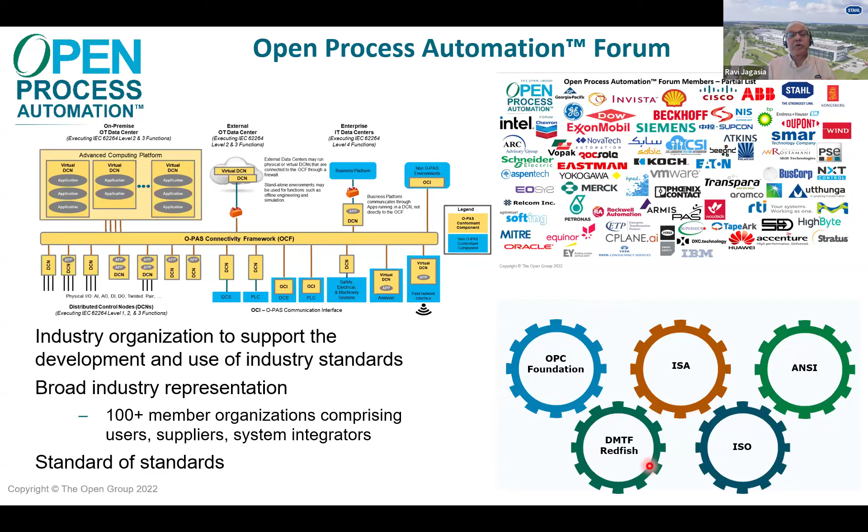So we are working with a lot of standard development organizations, the OPC Foundation, the DMTF, and various others, where we are working with them to update, improve, add value, and develop and integrate those standards into an overall open process automation standard.

Today's ecosystem, you have the automation vendor—could be a PLC, a DCS—and then a system integrator like you, putting together the solution based on the end user, your customer's applications. Your expertise of the industry, of the equipment, your expertise of the processes to implement and execute, which is also a very important part of the expertise you carry, and then even the possibility to maintain it over a period of years.

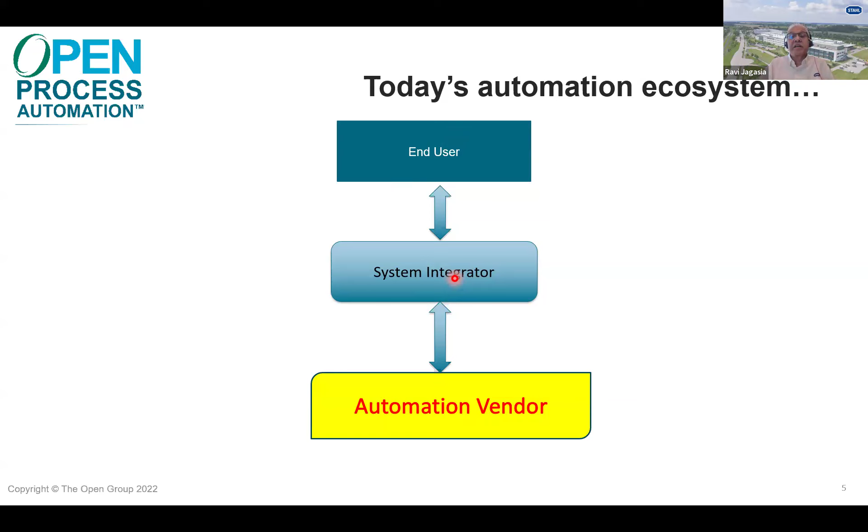So this is your current ecosystem, and what OPAS is trying to do is build up something very similar. You are still in the middle of the game, but then you have separate hardware suppliers and software suppliers. Part of the story is that you will be able to have an interoperable system, and interoperable systems would give you the flexibility of using multiple hardware vendors and multiple software vendors. It also gives you the facility that you would be able to use softwares and port the applications you have developed from one hardware to another. So a lot of the capabilities are brought in by these two vendor segments.

Now, it is not necessary they need to be separate. They can be all one. You could have the hardware vendor also providing the software component as well. And then as an integrator, you are implementing it down the way and installing it at the end user's facility. Service providers basically are providing these services from a product lifecycle perspective. You are providing support during the operations at the plant. So that could be another role which is part of the ecosystem which you could be implementing.

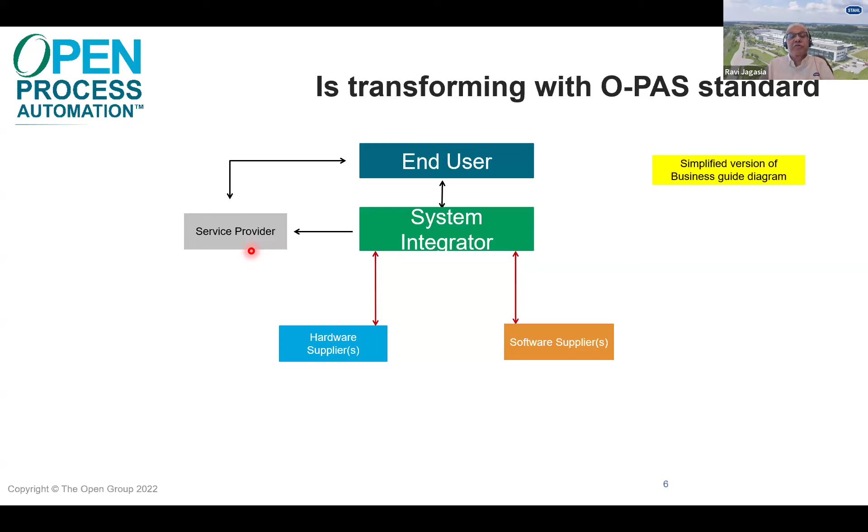How are we developing the standard? The ecosystem—you as a system integrator, the vendors, and of course the end users. You all have user stories, you have experiences with your current installations, and you are wanting a change, you want something different. What are your expectations?

You would be building it up and sending it over to OPA as user stories. We can develop use cases out of that. And probably then even a system integrator is providing a use case, or even the vendors are putting up the requirements. All of these boil down into the standards. They are being discussed, they are being evaluated, and then they are being generated as profiles, as certification requirements, and then they are being implemented into a standard. So that is how the industry voice drives the OPA standard.

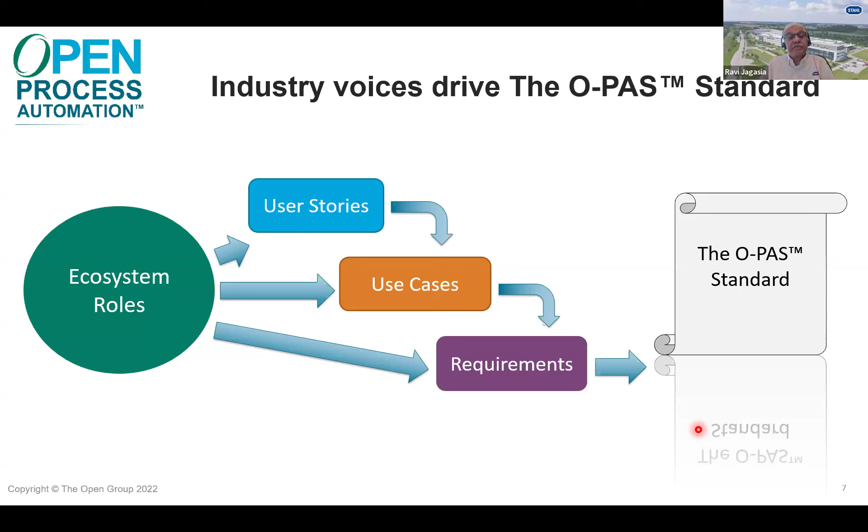Standards are going to enable functionality. What you see right now is the standards which have evolved over the period of some 2017, if I remember correctly. First version was with interoperability, then was the base configurations, function blocks, configuration portability, and then these are in the works as of now—application portability, orchestration, physical platform. So it's an evolving standard.

Is it done? No. Is it ready to be implemented? Yes, version 2.1 is ready for you to implement a testbed, is ready for you to implement a pilot project and even actually commercialize. This is what we are going to show you—a commercialization of the project.

So that is the workflow that we have within the forum of what we have to do to finish the standard. Of course, it is a continuous improvement project, so we'll keep on updating, improving as what we learn from these implementations and what we need to adapt and improve.

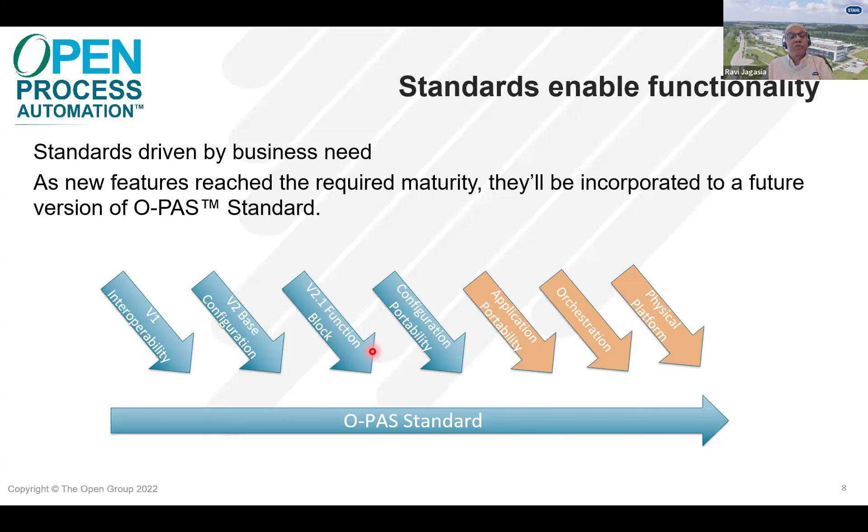COPA. So OPAF is a standards development organization. OPAF will not go out and market. These are the OPAF members who have come together to market the OPAS-based solutions. So together with CPLANE, together with Control System Integrators Association, with currently these integrators—Wood, EOSYS, Burrow, and others—and then the component suppliers, we are putting together industry-proven devices along with the capabilities of system management of CPLANE and CSIA, and then also the system integration teams which are there.

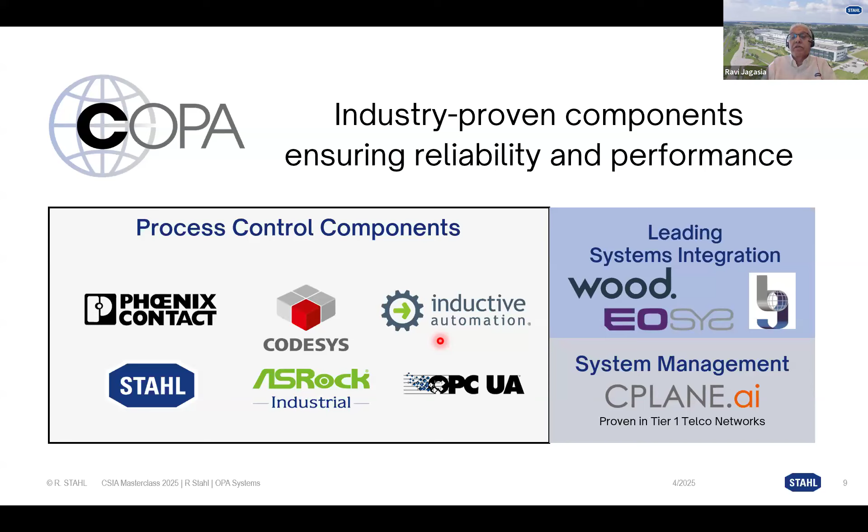It was, of course, built on the open standard, the OPA standard. It ensures high availability applications. It's intrinsically secure, capable of remote management, and the cost factor is the most attractive part—not only the capital purchase cost, but also the total cost of ownership. You will see a lot of savings there.

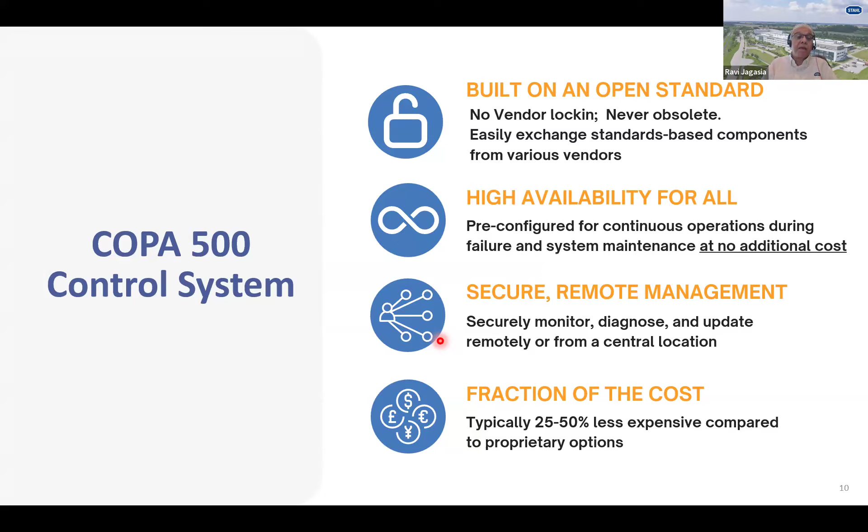Texas A&M project—this is the first commercial project from COPA, and I will let Timothy take over here. Okay, thank you, Ravi. You have control. Okay, very good, I appreciate that, Ravi. I'd like to advance to the next slide now. There we go, okay, yes.

So this project is for Texas A&M Nuclear Engineering. They are ranked #1 in undergraduate nuclear engineering programs and #2 in graduate programs. It's home to one of the largest university research reactors, with a strong partnership with national labs, the Department of Energy, other industry leaders, and strong support from the state of Texas. They've formed a Center for Advanced Small Modular and Micronuclear Reactors under the Texas A&M Engineering Experiment Station, with the goal of advancing the nation and state's leadership in advanced nuclear technology.

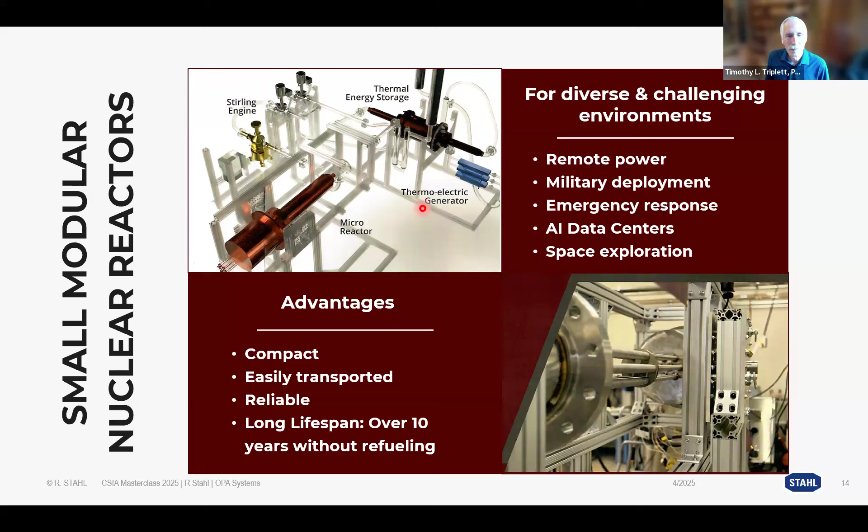Let's see if it'll go to the next slide. Yes, okay. So A&M's objective—because small modular and micro reactors are going to often be in locations where there isn't a large staff to support, train, or operate them—there's a need for autonomous control and remote management. And of course, when you start talking about remote management, cybersecurity becomes a critical factor. So their objectives were to answer these challenges: remote management, autonomous control, and cybersecurity.

If you'll advance to the next slide, please, Ravi. So they established a controlled test bed to prove out the technologies that are critical for these reactors long term.

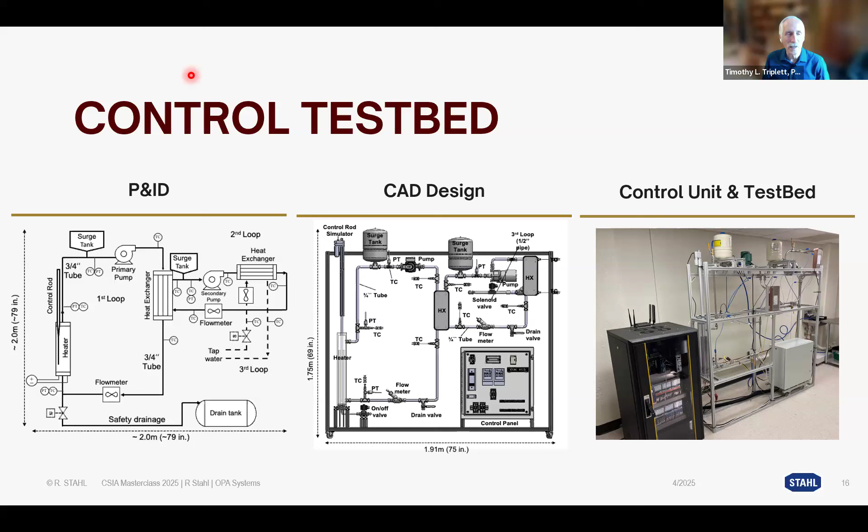So having designed the experiment, the next question was, what control system are we going to use? I mean, there's a variety of standard control systems available out there, but they wanted something that was modern, open, and could be the very best at helping them reach their research objectives with cybersecurity, reliability, rapid iteration of the design, so they can make changes, test them out, do modeling, and iterate over and over again.

So that was important to them, to have high compute and data capability, remote management capabilities for it. And so when it all boiled down, the COPA 500 was an obvious choice.

The Stahl IO is very flexible and proven. The CODESYS control is a de facto standard for IEC 61131. The Ignition HMI also very well established and from a good company with good support.

The ASRock industrial computer - and this leverages all off-the-shelf type of technology. So these components are not expensive, especially compared to a DCS vendor or even the normal smaller PLC system suppliers. A Supermicro, terrific capabilities as far as the computer.

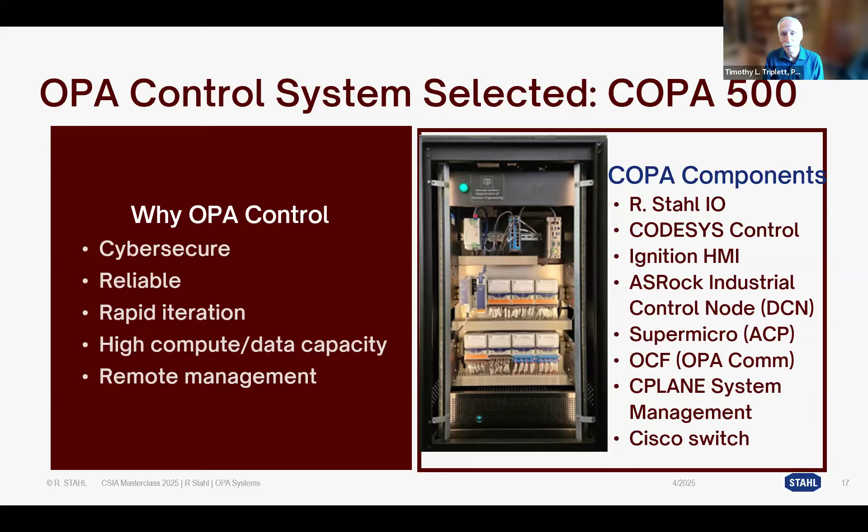As you're looking at it, on the right side, power supply, switch is all there. And it makes for a very nice system. And it's fully integrated - that was of particular interest to us.

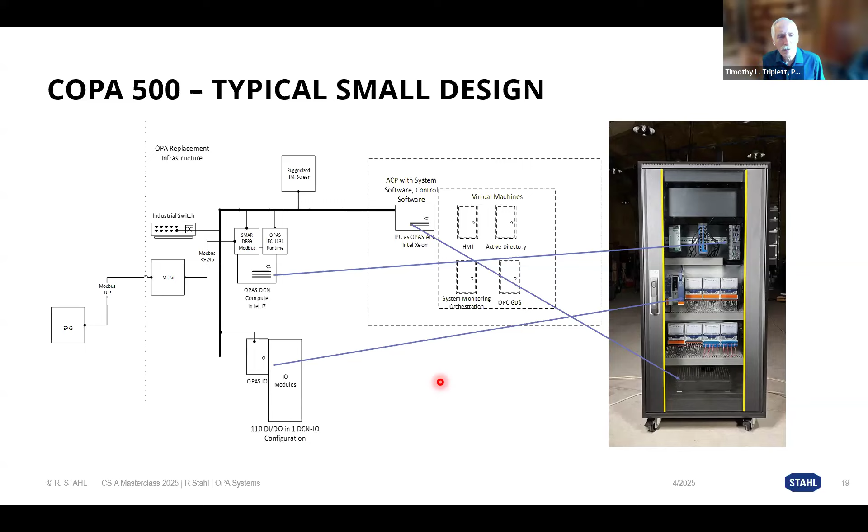Okay, so now, Ravi, I'll pass it back over to you. Thank you.

And here we go. I'll give you all a brief background about STAHL in case you don't know, and also on the IOs particularly, how they are available with the OPA solutions. So we were founded in 1876. I may look old, but I'm not that old.

It's a company with a lot of electronics involvement, electrical products, and we also build complete solutions, in the sense that in the IECEx and ATEX world, they need a certified workshop who can do it. Here in the NEC world, you have the UL 698A, which allows you to build and certify the complete solution. We can also do trainings, and we also do hazardous area evaluations and services related to that.

Based in Germany and accessible all over the world, with around 18 operating subsidiaries and beyond that about 59-60 offices. In 2024, we closed 344.1 million euros with 1,743 employees across the globe. Small company, small but nimble. We were able to learn the opportunities of these new or emerging technologies and be part of it.

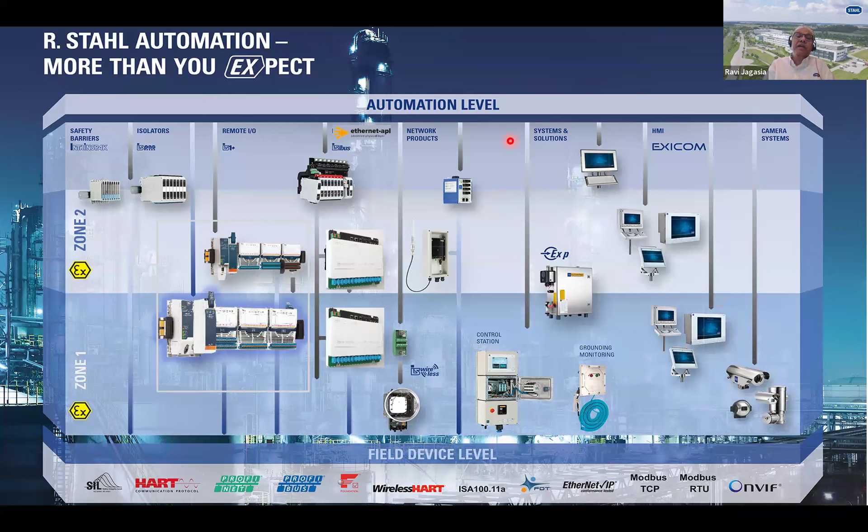We've been doing this for the last 30 years. In fact, the iteration from 2000 onwards has been consistently the same. So you have a very good form fit factor, which allows you easy replacements. Very early, in 1997, we implemented the Profibus DP RS485 standard, which we then donated to the Profibus International Organization. We were the first to use in 2009 the fiber optic Op is standard, which allows us to run fiber optics into hazardous area without a conduit, just regular fiber optics, maybe an armored cable.

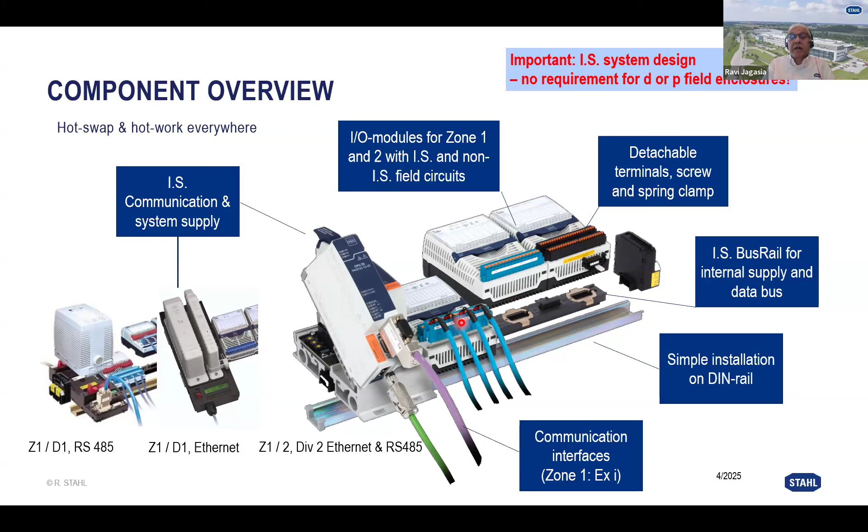These all have an intrinsically safe communication bus in the back, so you can implement hot swapping. And then, of course, the flexibility of using either detachable terminals or screwed terminals. That's the socket, from the perspective of 3-slot but also 4-slot. More importantly, you have the capability to select protocols here. Specifically, if you're using it as a remote I/O connected to traditional PLC and DCS networks over Profibus, Profinet, Modbus TCP/IP, Modbus RTU, or EtherNet/IP, you can select the port over here.

And then if you have the RS485, you can select the addresses over here. That's how simple and easy it is. Good enough for -40 to 167 degrees Fahrenheit or 75 degrees C installation. You can use either this 3-slot version or the 4-slot version on your right, where you will have redundant CPU and redundant power supply as well.

The IOs, some very good features over there. We all know that project engineering goes until the time you have installed and commissioned your panel. At the last minute, you always have a requirement of one additional input, or one wire is going in another panel and not in this panel. So very flexible,

multifunction, configurable I/O signals. The discrete or digital I/O module, I can configure it as input, output, NAMUR, discrete inputs, whatever I like. The analog input module, I can configure it as input, output, 4 to 20, 0 to 20, with HART, without HART, with alarms. I can also have a temperature module, which can be either an RTD or a thermocouple or a PT100.

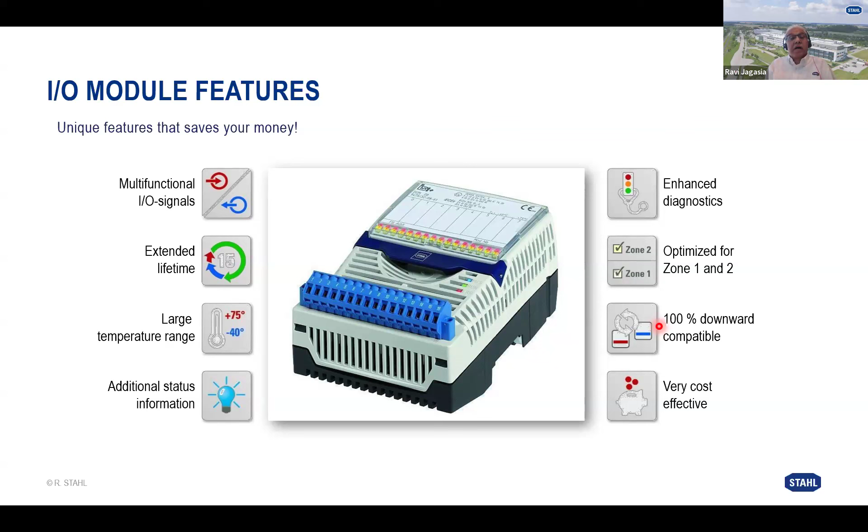Basically, you are able to do 16 channels per discrete module and 8 channels per analog or temperature module, especially if there are 2 wires. 100% downward compatible, and then of course it's very much cost efficient because of the high IO density. That's the range for the Zone 1, Div 1 hot swappable IO modules, intrinsically safe outputs. These are the 4 and 8 channel versions because they have to drive a lot of power.

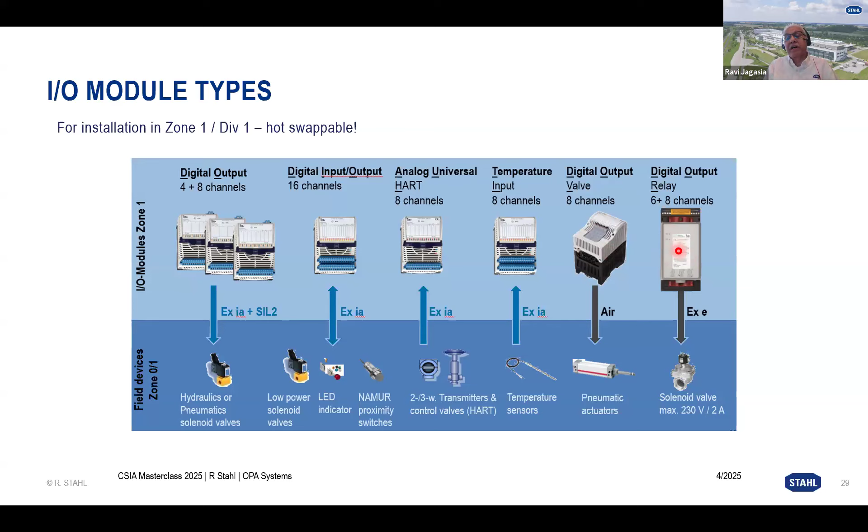But then I have the digital input output, which is soft configurable. I can configure it as input or output. The 16 channel version, the analog universal, the temperature. This is an interesting digital output module with a solenoid valve built into it. So I don't need a separate valve station. I don't need a separate IO station. I can run it on the same remote IO station or an extended IO station. And this would be your output to drive high voltage, high current capabilities.

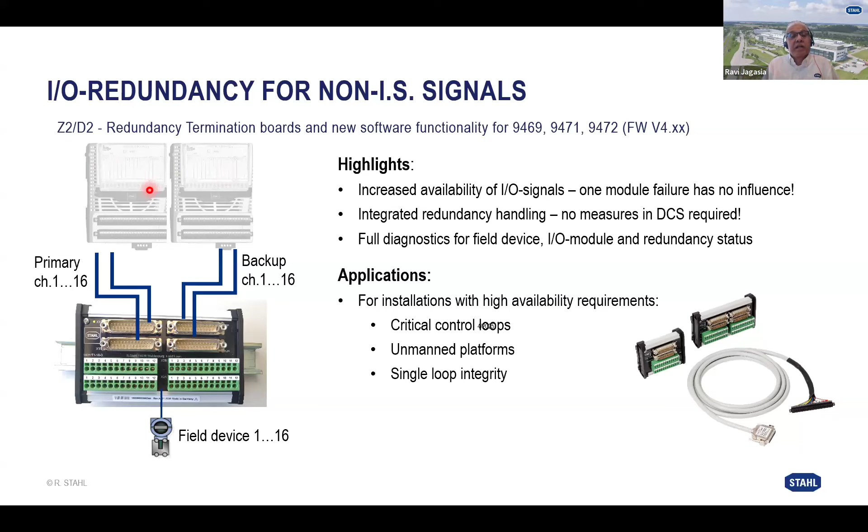For the non-intrinsically safe or the non-incendive IO modules and field devices, we can offer IO redundancy like we had for the CPU redundancy. One major capability is that these IO modules are talking to the CPU, so you actually don't have to go to the DCS CPU or the PLC CPU. The IO CPU is voting where to take the data from if one drops dead and the second takes over. And then it is also alerting you at the HMI or the alarm manager that, hey, one of the IO modules is dead, you better replace it.

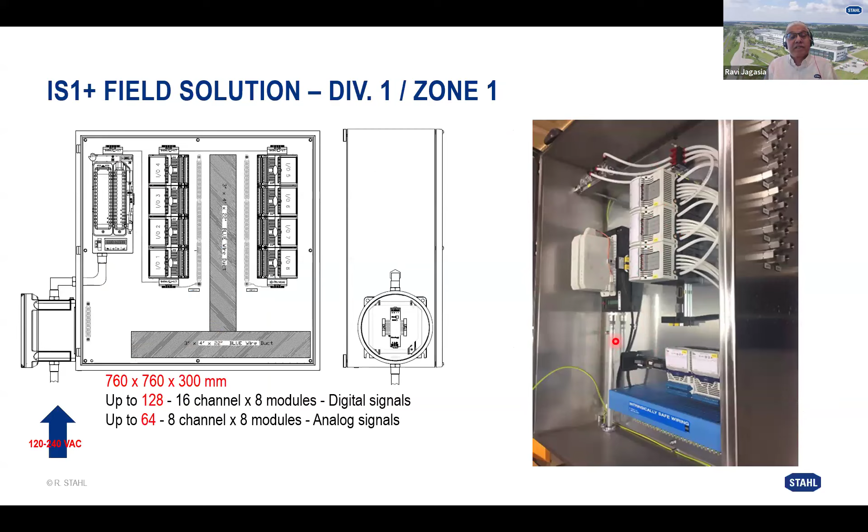A sample construction, especially I wanted to show you this valve island and the IO island all together. It's a Div 1 installation. This is the only conduit here, and then this is the complete enclosure in a NEMA 4X. Again, here the IS and the non-IS, and a different construction in a 1200 by 1000, you could do anywhere between 128 signals to 256 signals.

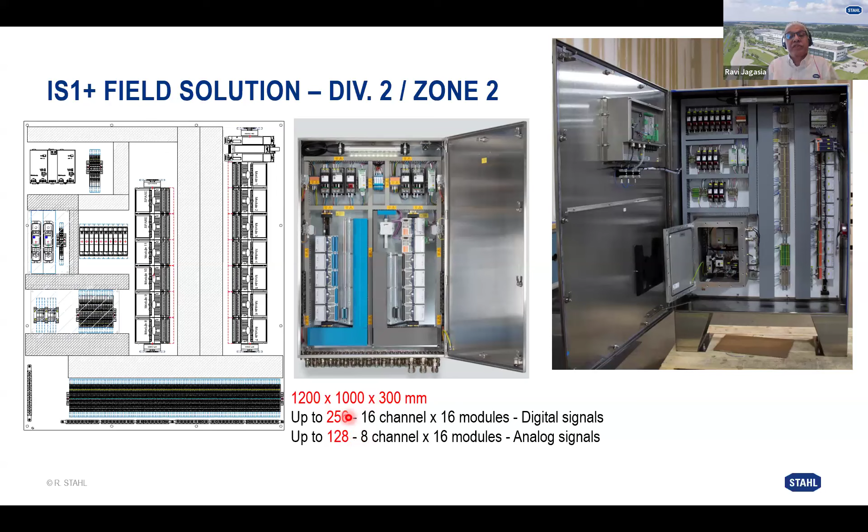Okay, that was all about the IOs, but what are we doing for O-PAS? So, with the newer hardware and the capability to have an open OS system like Linux, we were able to implement 3 versions. We have this DCN IO, which only has an OPC UA based OPA server. It talks the O-PAS connectivity framework information model, which can then be accessed by the DCN compute or the ACP. So that is acting like a remote IO, but not with the traditional Profibus, Profinet, Ethernet IP, but with OPA server. This is the -40 version.

Then we also have the capability to embed the IEC 61131, in this case Codesys, which you can implement, which is part of the O-PAS group. And then you could also implement IEC 61499 runtime, which is the universal automation, which is nothing but distributed control or an event-driven based programming, unlike the IEC 61131, which is a sequence-driven programming standard. Though the languages in 61499 are similar to what you use in 61131.

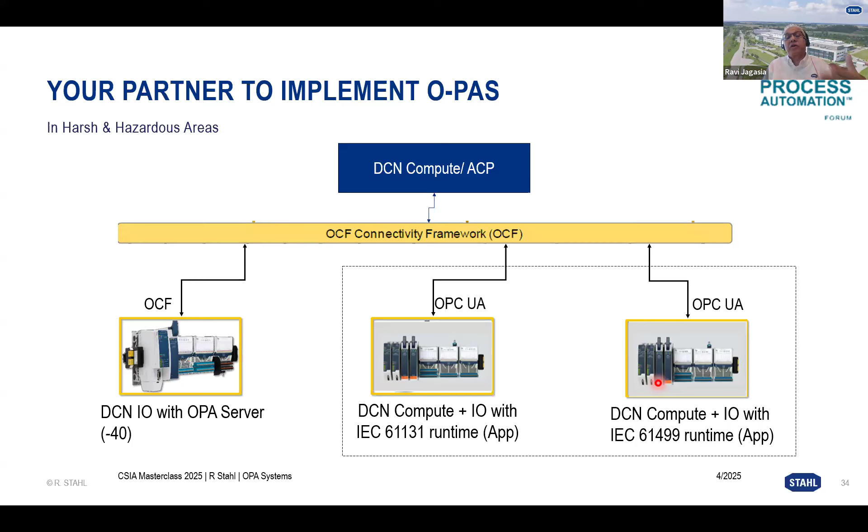The 61131 standard, as you would all know, is the same standard that is used by most of all the PLC companies for their IDE, for their engineering tool. It is only that they customize it, add some value add features, and then customize it for their hardware. So if you do know any of the ladder programming, function blocks or sequential function charts and all that, you could still do those programmings on a Codesys platform or on a 61499 UAO platform.

O-PAS has been in play since 2016, 2017, since the association with Open Group. ExxonMobil built the first test bed and has also implemented the first lighthouse. That's what you see is an image of one of the IO panels. 90% of the IO counts were with STAHL's IS1+ extended IO, and the selection of the IOs was by the plant, by the actual user who wanted a more sturdy G3 compliant configurable IO where they have all those flexibilities like the flexibility O-PAS standard provides. So that is what is now running since 2024. Some of the other test beds were built by Schneider, by Intel and demonstrated at the NAMUR General Assembly in 2023.

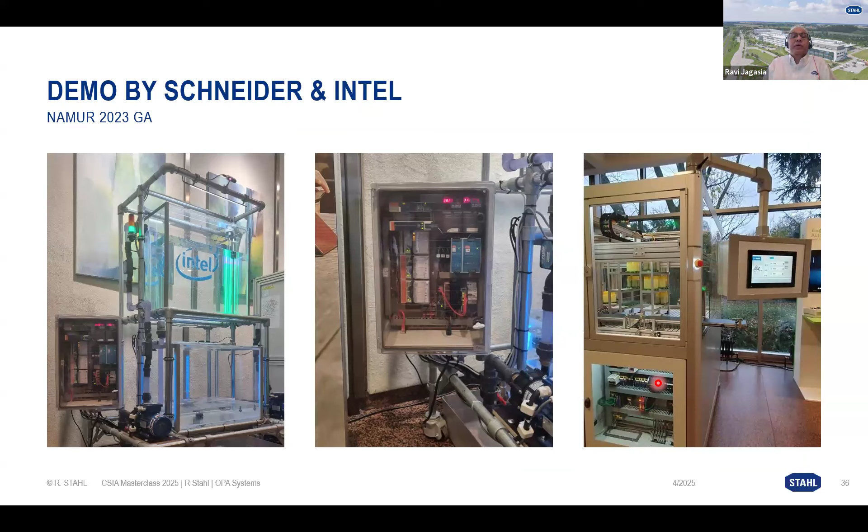Please note this is not good for safety systems or fire and gas systems. OPAF doesn't cover safety. It is only limited to the control system. And then additionally, these IOs are not rated for safety. Not good enough for robotic machine control or a conveying system. It is good for a process industry application. So again, please be aware of these limitations from a perspective of using our hardware.

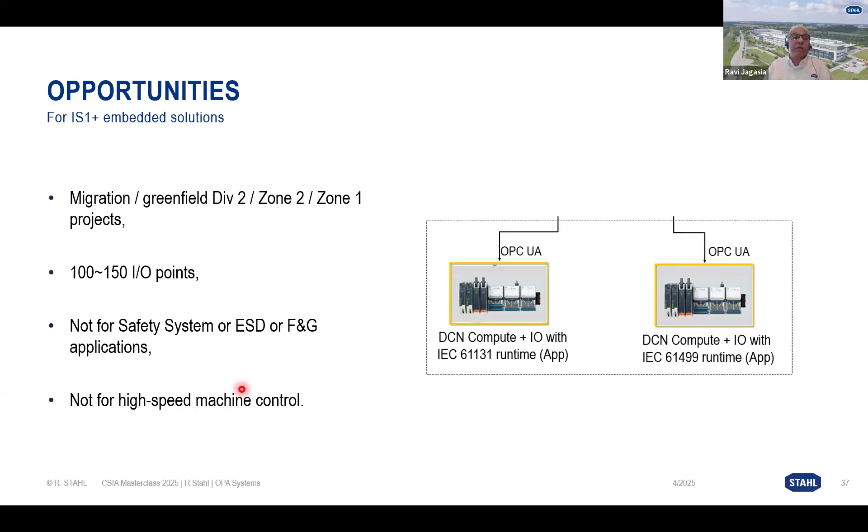I get back to Tim, and he shares with you the current status of the Texas A&M project. All yours, Tim. I'll continue to scroll through as you tell me. Okay, I do appreciate that, Ravi.

Yes, and I appreciate your comments about point counts, like 100, 150 point counts and such. Just to be sure the audience is clear on this, OPAS, open process automation systems, can scale way beyond that, up to large systems, what people would normally think of as a DCS type of application. So it's a highly scalable system, with the distributed DCNs, each DCN handling its particular geographical or functional area where that's been assigned. So for A&M, this was one of the smaller applications.

And also from a systems integrator perspective, with open process automation, particularly as it scales to larger systems, the system integrator role varies from what traditionally it might have been. When you get into the DCS type size of systems, oftentimes the supplier, the vendor, would sort of politely nudge the system integrator out of the way and take responsibility for the entire system and require that in order for them to guarantee and warrant their system. But now with OPA, the systems integrator is in a really good position all the way through the project, because he's an extension.

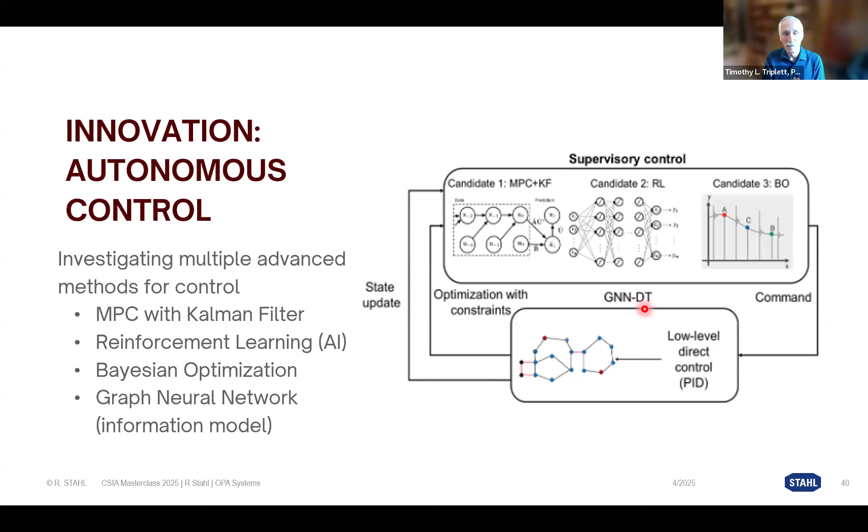Okay. These are some of the higher level control that's being done in the compute package. And it is things that A&M is looking at regarding autonomous control. Most systems integrators don't really get into this, but trust me, there is a lot going on in the world of autonomous control and the development there, and the researchers love the capabilities of the system. If you'll go to the next slide, Ravi.

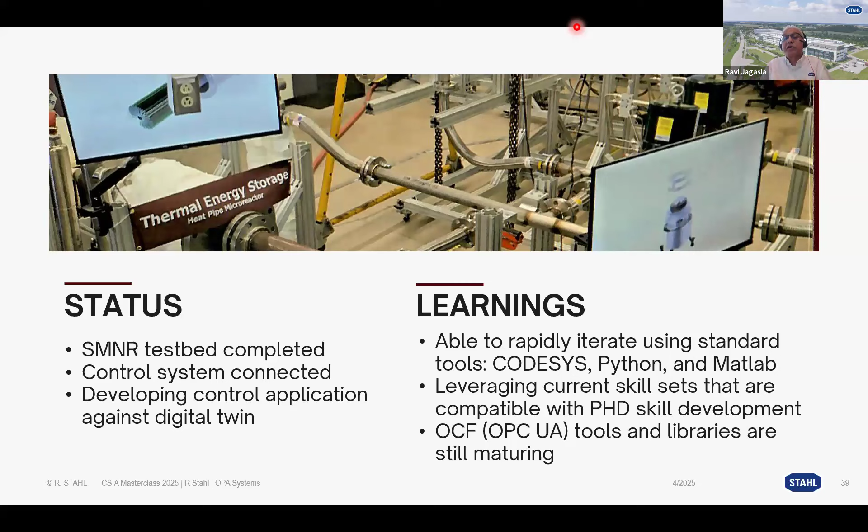And you can join COPA, you can join OPAF, and you can learn more of the technologies. You can share your stories, what experiences you have from the test bed or otherwise, and we would be happy to take those inputs in and incorporate them.